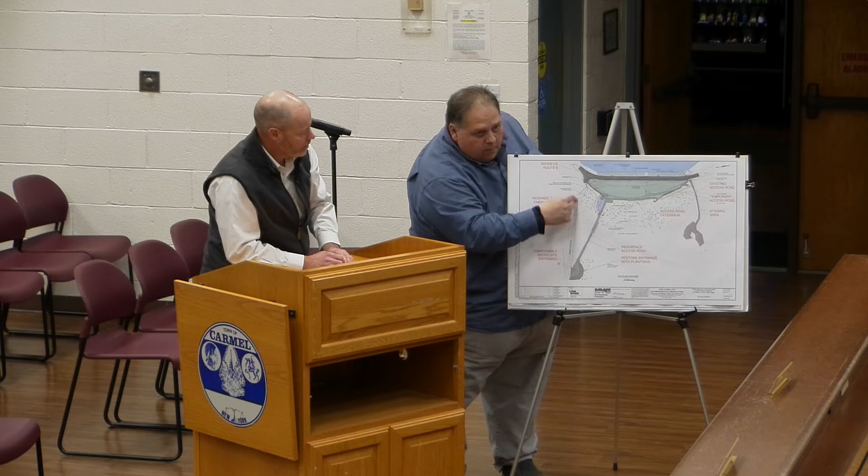There's a former landfill, right at the top of the building. Oh yeah, I know that facility. Right, the old dump is right there. This is where this road right here is.

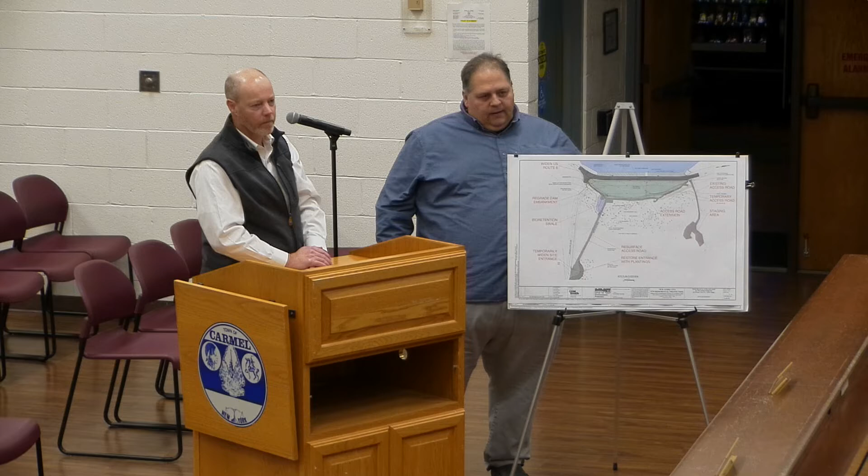Yeah, we're on this Route 6. I know it. Now I know where I am, Drewville Road is the one that goes up. Got it.

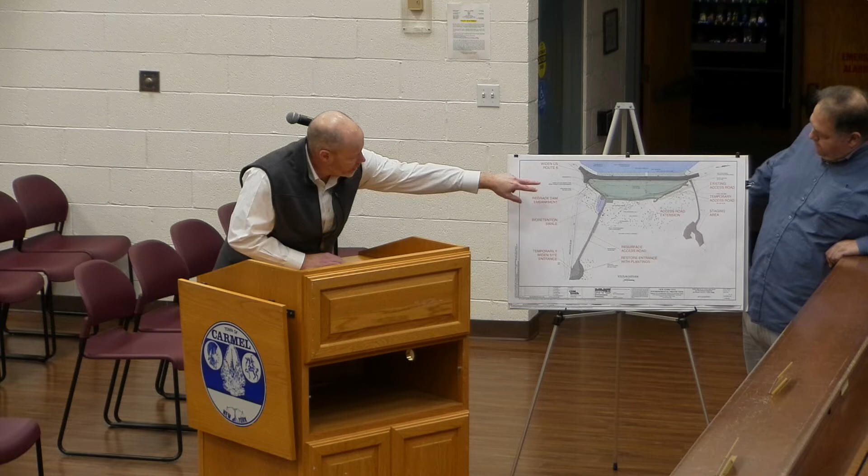Was it an earthen dam? It's an earthen dam, yes, with a concrete rubble core embedded within it.

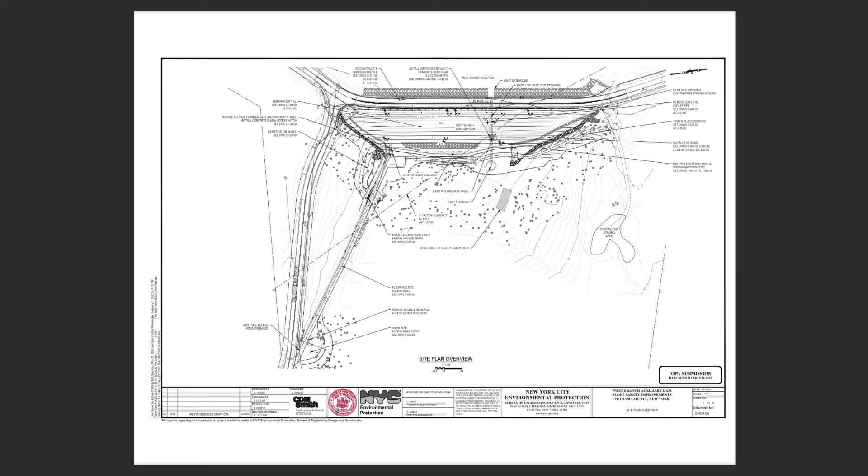And then so that's there. In addition to that, we're doing some drainage improvements to collect seepage that comes through the earthen portion of the dam and drain that away properly. And also, as Paul mentioned, there's some issues with the roadway drainage washing over the crest at the top of the dam, causing some erosion.

We're gonna collect that and put it down into a bioretention swale down at the base of the slope before it works its way out off the site.

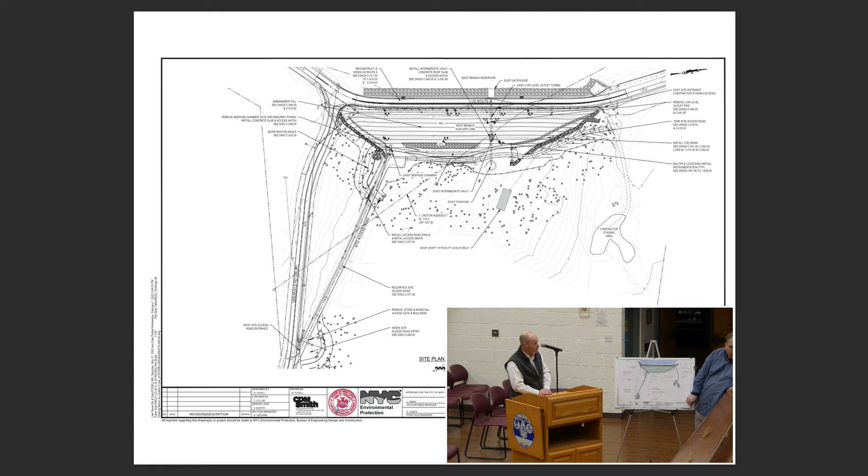Drilling. Yeah, we've been drilling across that.

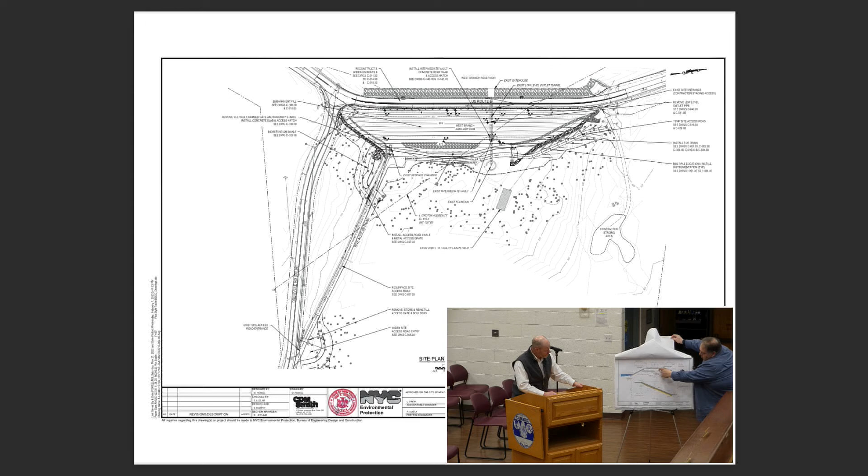These next, just a little more detail, maybe this could show you while what's going on. This will give you a little bit more of an idea. Here's the top of the roadway, here's that - it's gonna be really built up here, and here's the material we're gonna be adding to that face of the dam. So we'll keep building them up the way up, one more stable slope, make the improvements up here.

This will be done in the first year, we'll talk about. Second year, we're coming and redoing the whole thing, so it's gonna have a whole new roadway on top. Was it a 2-year project? It's about two, you figure 2.5 years total, but one full season.

You're doing the dam work. Are you doing one contract or multiple contracts? One contract, he's coming in for 2.5 years total, one season on the dam work, and then one season up top. We have traffic controls that we've worked out.

We'll actually put a signal up there - we'll show you the other part of the site - to kind of control it, the traffic control is probably the biggest challenge here. Are you gonna be turning that into like a single lane during construction of this? So, I don't know if we get into it here.

I don't know if it shows on there, but what the intent is, and as Paul mentioned, some coordination with Rich Franzetti and the planning board and whatnot - it was recommended to us that we do the roadway construction at night. So the bulk of that work will happen at night. There'll be alternating one-way traffic, controlled by signals at either end of the dam.

During the day, it'll be back open, free flow. Sometimes it'll be on a gravel surface as they're building up the road bed, but it will be two-lane traffic during the daytime.

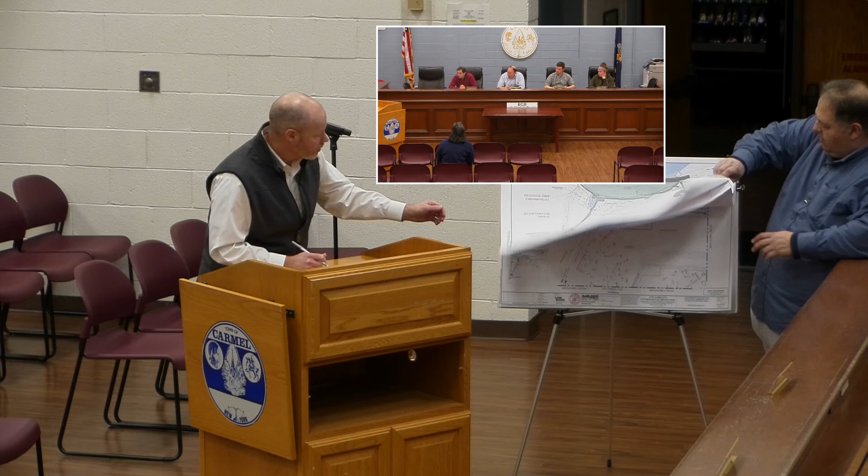All right, for the very large one, for the area between the road and the edge of that wetland, every 100 feet I want wetland markers - Town of Carmel wetland markers. This way people know that there's no building in this area, it just identifies it as a wetland marker. And for the one on the right, again, the area between the road and the wetland, every 100 feet.

Okay? So on the smaller one there would be - well, you've got two sides to do, between the dam and the road, and between the dam and the top edge of the wetland. Just their wetland markers, Town of Carmel wetland markers, this way they identify the wetlands in the future - not that there's going to be development on it, but...

Who knows who will own this dam in 100 years? Who knows, but maybe it'll be you. Maybe. It's for sale.

Heard there's a bridge as well. Does it - Rose has it. Rose has them, as far as like a little placard with details - Rose has it.